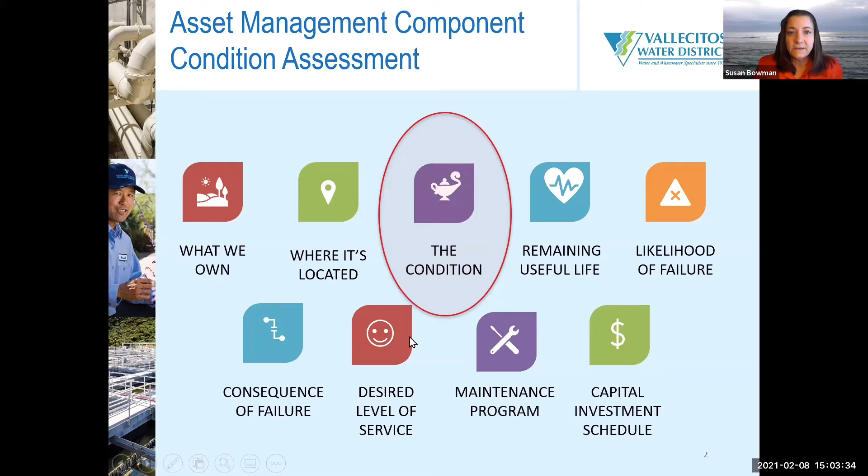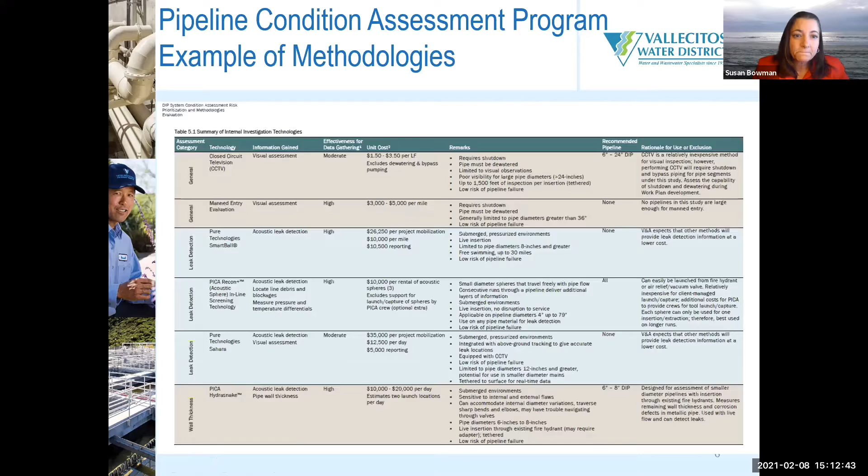So what about the condition of our pipelines? Business risk exposure is what we're going to use to really determine what the priority pipes are as we go forward. And it's important that you do this kind of a risk exposure to understand that not all failures are due to something as simple as age. The pipe condition has a lot to do with the performance of a pipe.

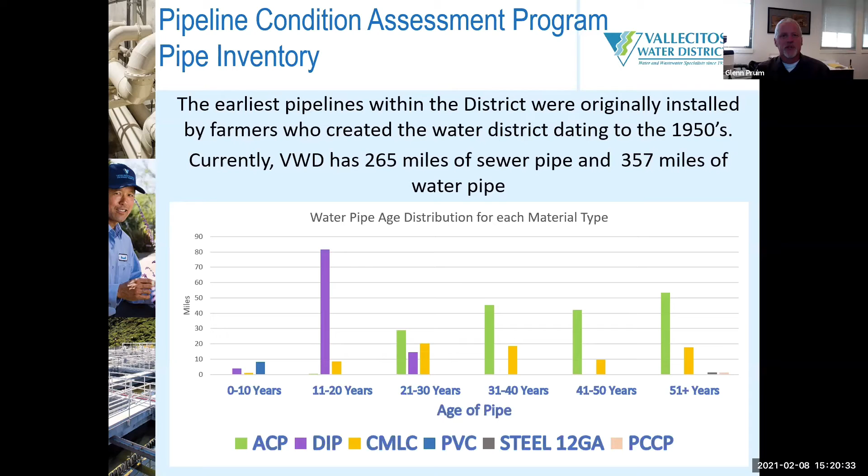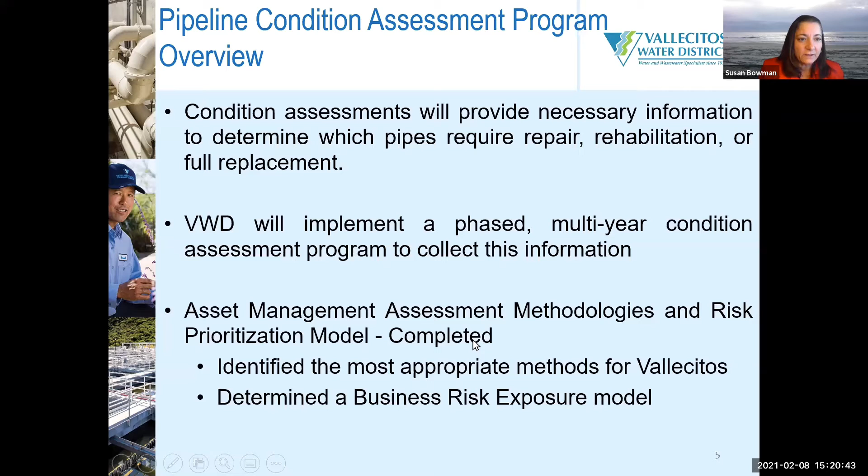Yeah, but the soil corrosivity, as we'll talk about in a minute, is something that we'll be looking at, which would contribute to how quickly that corrosion occurs. Okay. So the business risk. Susan, I have a question before you move on.

I'm wondering, on the CMLC pipe, do we have cathodic protection systems on that steel pipe? Yeah, Director Elapart, we sure do. It's almost all passive systems with anodes and test stations. On our CMLC and any pipe 16-inch diameter or larger, we have anode systems, passive systems installed. Almost all of our CMLC is our larger diameter, and for us, larger diameter starts at 16.

Okay. And on the tar wrap steel, is that just that one line out in Twin Oaks Valley? No, the tar wrap steel is primarily the line that we call the Tres Amigos line on the north end of the district. And the board may recall, we're replacing almost all of it. Right. And Ryan, are we replacing all that tar wrap steel? Is there any section that's being left? You're on mute. No, we are taking out all that tar wrap steel in its entirety to the junction where it turns to cement mortar lined and coated steel. Okay. So when the Tres Amigos job is done, the tar wrap steel will pretty much be gone.

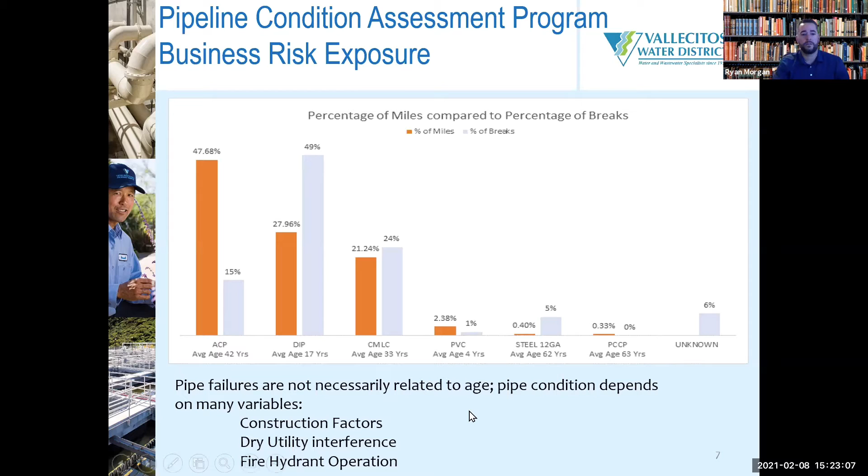Okay, thanks. You're welcome. So the business risk exposure is a calculated score that is made up of the likelihood of failure and the consequence of failure. The likelihood of failure is directly related to the condition of the pipe along with other factors, which I'll show you in a minute. And then I think we talked about last time as well, the consequence of failure, which is not always something that can be changed. It's based on the location of the pipe or maybe the customers it's serving.

It may change because of the customer base, but consequence isn't normally something that the district has a lot of control over as far as ability to modify it, but it certainly is critical to understanding then what different pipelines, what their risk is to the organization and to our customers.

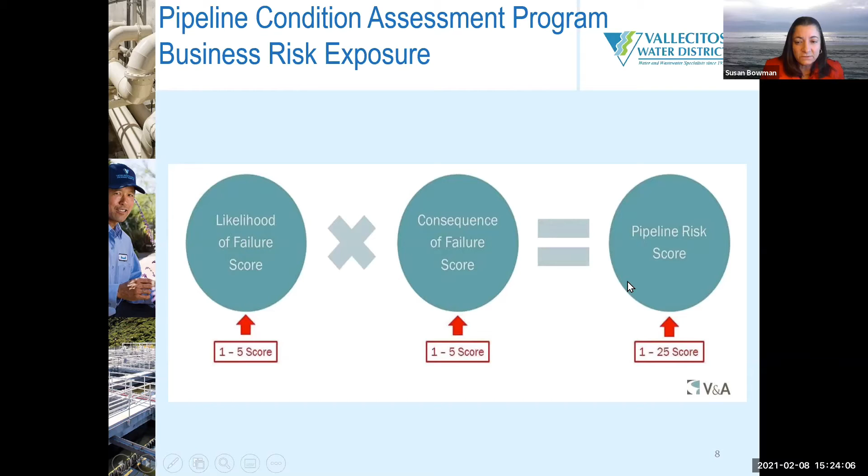The break history, again, that's data that we have. Break history and most recent break, that's data that's available to us. The hydraulic fluctuations, again, data that's available to us. And the installation year is also a known piece of information. So as you can see, getting a good understanding of an asset's likelihood of failure is important not only because of the weighting, but just the fact that it's not easily known what the condition of the asset is unless you perform these condition assessments to determine that.

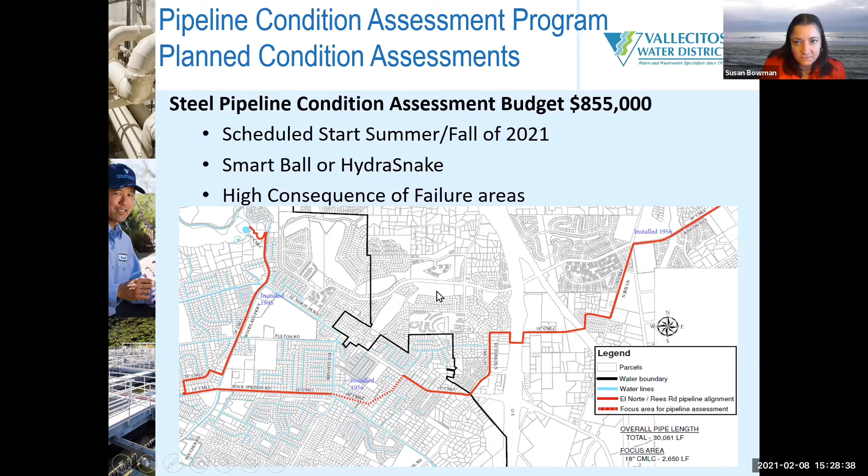And the last one I wanted to talk about, which is actually going to take us into the next agenda item, is the ductile iron pipeline condition assessment. This is a continuation of the work that we had done with V&A, and we are going to be doing leak detection for determining where there might be a high likelihood of failure. And we can use that to determine where we may need to do additional assessments. So we'll be inserting a device that will do some listening for leaks, and will then direct us to do further investigation.

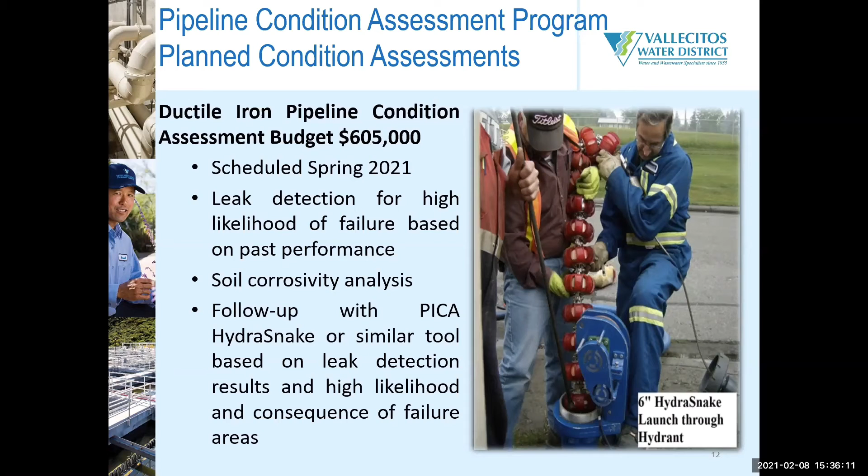Okay. And lastly, your risk assessment seems to be at odds with the discussion of materials. The discussion points very directly to the ductile pipe issues, but those are some of the youngest lines. So why doesn't there seem to be a correlation between the rating factors and the life of the pipe? Thank you. I could start on that, and Susan, you could correct me or add to it.

So the ductile iron pipe is fairly new pipe, and it's actually a very robust pipe, but at least a big chunk of the failures that we've seen in ductile iron has been due to dry utility crossings hitting and damaging the protective coatings, whether it's the bag or the actual pipe itself, leaving the pipe exposed, and then over time it corrodes.

So the majority of the condition assessment program is specifically for ductile iron, because the ductile iron pipe itself, if it's in good condition, has a very long useful life. If we could find these point failure spots from human errors from the past, then hopefully we could assess and repair those before they become breaks. Then the remainder of the ductile iron can continue to be a very long useful life asset. Susan, would you like to add anything else to that?

I just would like to point out that the likelihood of failure calculation that was shown here is specific to the ductile iron pipe. I know it doesn't say that on the screen, but that is one reason why you don't see material type as a factor in the calculation, because it is solely for the ductile iron pipe.

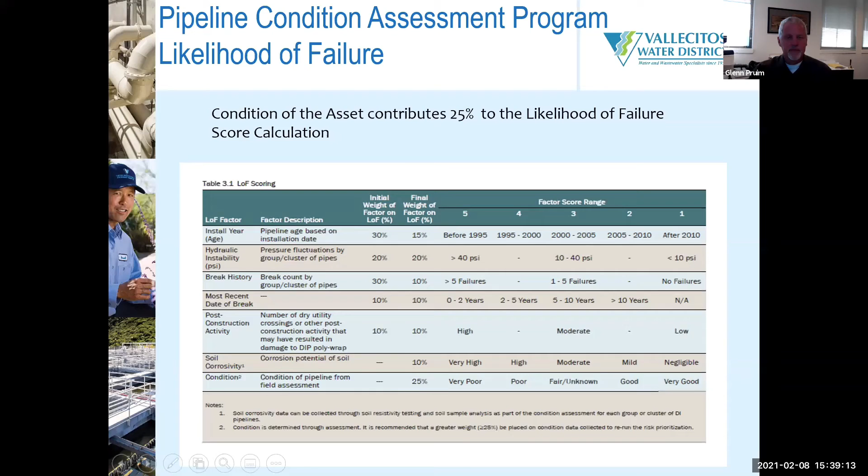Okay, I think are we ready to go to item 2, Director Elizabeth? Yes. Okay, thank you. Susan, you'll be taking that too, I assume? Yes, yes. So I will just leave this up. I wanted to just direct your attention to the staff report.

So we're coming to you today to get a recommendation of approval to be taken to the board to issue a contract for V&A Consulting to perform the ductile iron condition assessment pilot project. So this is a small focused assessment of the area in the staff report that you can see. It's an area of 25 miles that was identified through applying that risk assessment that we just discussed across the district, assigning 25 areas and rating them based on the risk area. It's considered a cluster. And with that, we identified that areas 8, 9, and 10 are some of the highest risk.

And with V&A, what we're going to do is apply a couple of those technologies that we just discussed. Specifically, we're going to do a leak detection effort to have sounding equipment go in and provide us with leak detection. Although leaks are not a major issue in the district, what we want to understand is, does this sounding equipment provide us some information that can be used to correlate with the level of quality of the pipe that we have.